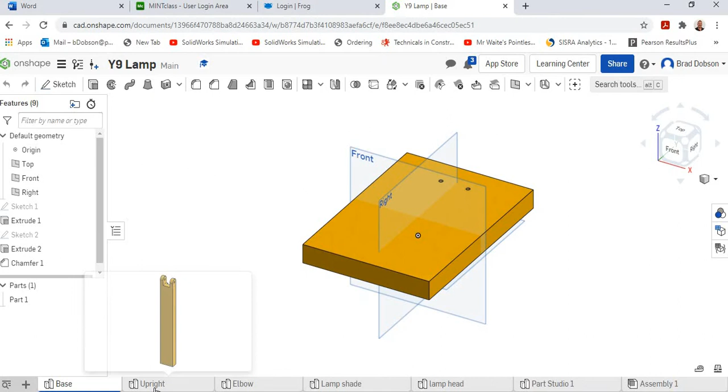Okay, now we've drawn up all our component parts. We've got our base, our upright, our elbow, lampshade, lamp head, and our cable cover. I'll just rename that.

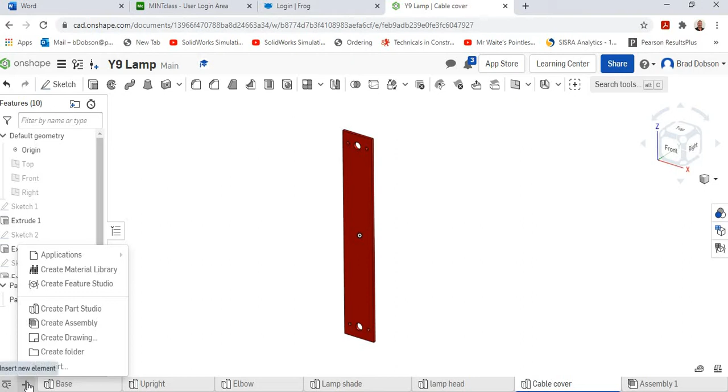We're now ready to actually assemble all our parts together into a functioning lamp, or into a model of a functioning lamp. So you'll see along the bottom here you've got an assembly tab. If that's never there, you can always add a new assembly just by clicking on this insert new element, but we've already got an assembly, so we'll click on that one. As you see, it looks very similar.

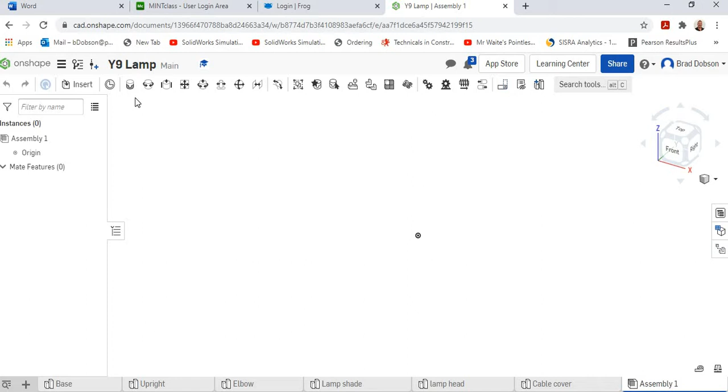However, you see that what's normally sketches turns to insert, and then we've got this series of mate connectors. Mate connectors are how we join our parts together, and we'll try and cover some of these as we go through this assembly. So it's relatively straightforward. We click on insert. You'll see it'll bring up all our component parts. We're just going to add our base first, because that's the one we want to start with.

So all I do is left click on it. It'll then drop it. Again, you see it allows me to move it. I want to position it somewhere sort of central to the origin. That's this little black and white dot in the middle. And the first thing I've got to remember to do, once I've done that, is right click over it and then fix it in space.

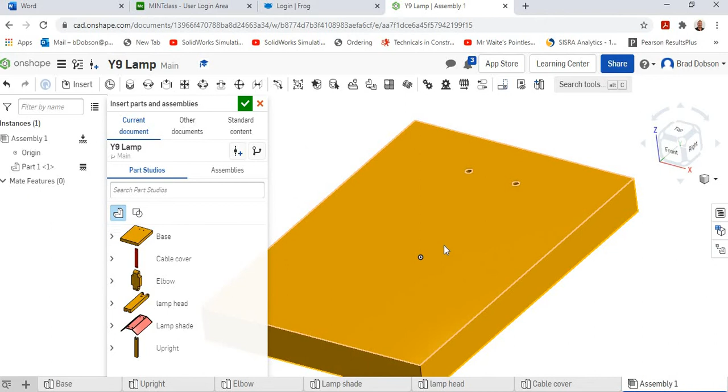So basically you'll see that it's sort of fixed around this origin now. I can still move it on the page, but I can't move it away from this origin. It's really important you do that on your first part. So we've got our first part fixed. We're then going to add our upright part. So once I've done that, I then go to upright.

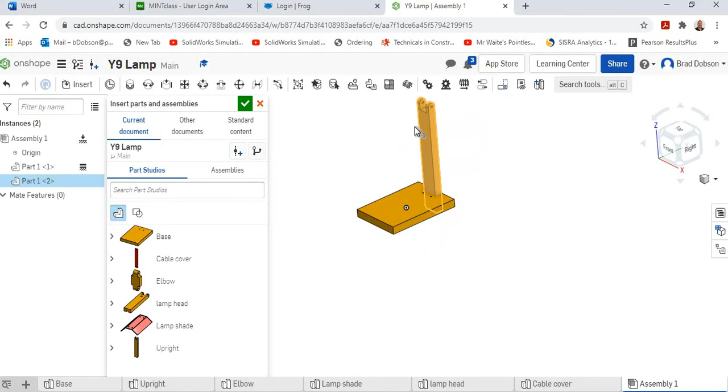So I'm already in the insert parts bit anyway, so click on upright, and you can see it'll then drop that in. Again, try not to drop it in the right place. You need to give yourself a bit of space to be able to see all the different views and everything. So I'm just going to drop it behind, and then we need to think about how we actually assemble this.

So if you're thinking you're doing this for real, what you'd want to do is align this bottom face here, basically attach it to this top face, so align them. We'd want these screw holes here to align with the bottom section here, and we want the back to be sort of aligned somewhere here. And again, how we can do that is quite quick actually in Onshape.

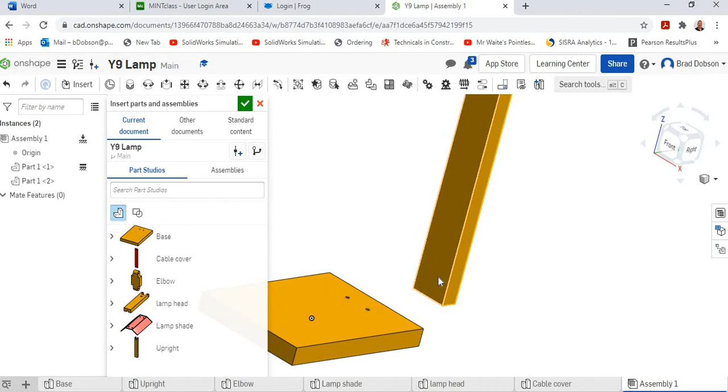Previously you've had to do all them separately, but we can do this with what we call a fastened mate. So once it's fixed in place, it has no degrees of movement. You can see as well when I hover over all these different mates, if I leave anything over for about 2 seconds, it gives me a little explanation of what I need to do.

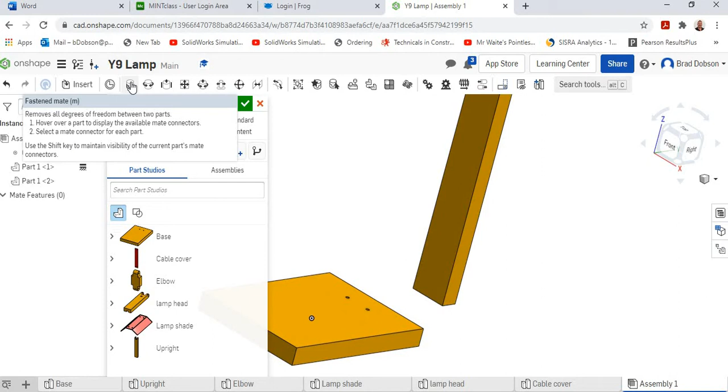So like I say, we're going to start on fastened mate, and I'll try and help show you how that works. So click on that. I'm going to select the bottom face. So I'm just going to rotate around. So you can see if I zoom in, I can select the bottom face, but I can also move this, sort of looks a bit like a timer. Whilst I'm there, I can move this, what we call the mate connector, to anywhere on our bottom face.

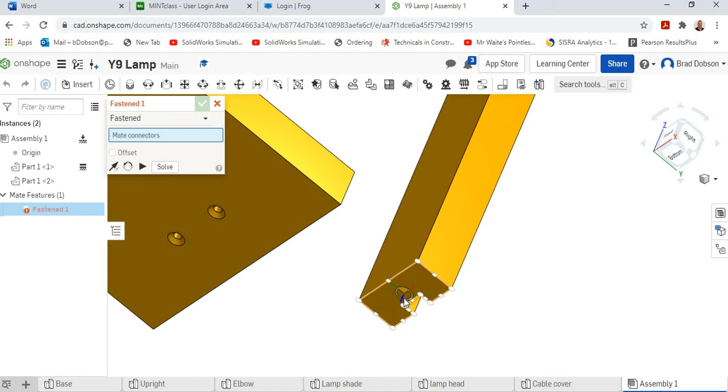What we want is our mate connector to be exactly, if I zoom in, in the middle of our little notch cutout. If you imagine that mate connector is like a big blob of glue, wherever I put that blob of glue, it'll glue to the other mate connector, you'll see in a minute, on the other part. So I'm going to keep it exactly in the middle, and then have that bottom edge.

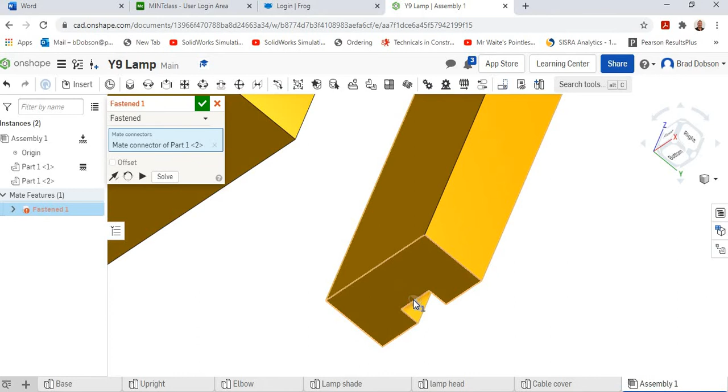So I click on it, so I've right clicked, and then turn my top round. So again, you can see here, I can select the top face, and again, I can select centre of holes, I can select midpoints, all that type of thing. So what I'm going to do, I'm going to select the top face. Let me just zoom out so you can see that top face. Again, you can do any face, but make sure it's the top face, and I want that mate connector to be aligned right on that midpoint of that edge there.

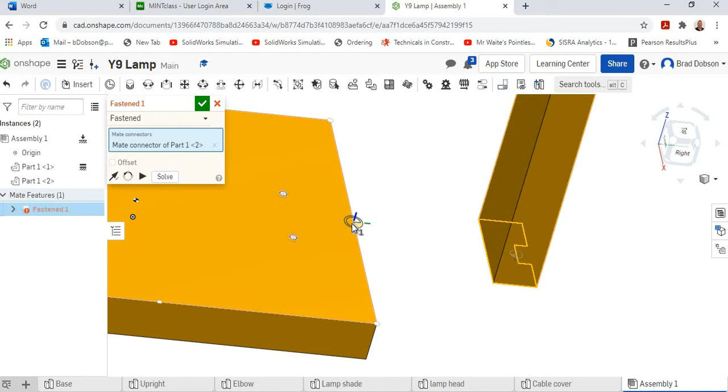You'll see that'll bring our work somewhere near, but you'll see that's not quite right. We actually want to shift this across here a little bit, so we're going to use this offset function here. If I click that, you can see I can start putting some dimensions in. We want to move the whole of this piece along this green y-axis. So if you see there, I can put in a measurement there. So we might start off with 25mm.

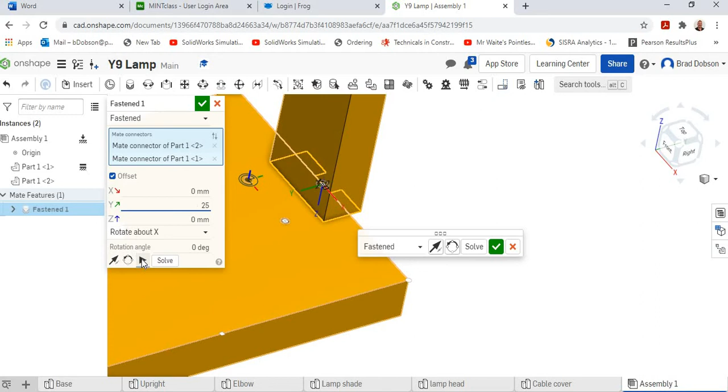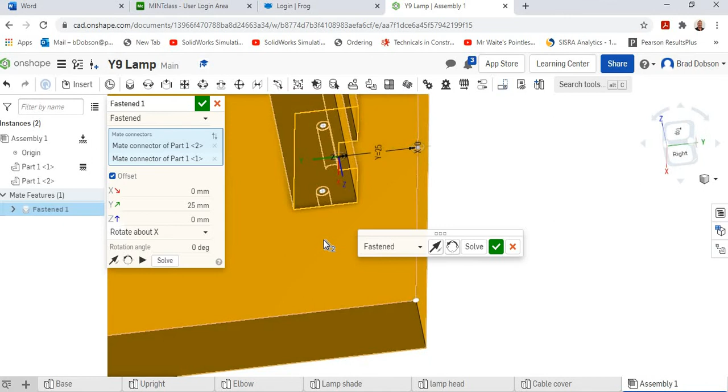Again, if I click on this little play button, it's going to give me a preview of where that wants to be. So you can see that's going to drop and move back our parts so that the holes are basically in the centre of where we need it to be. So we're happy with that at the moment, so we'll click on the tick box, and you'll see that's fixed that in position. I can't actually move that, I can't slide it anywhere, I can't rotate it. That has basically been glued in place. So that's our first part done.

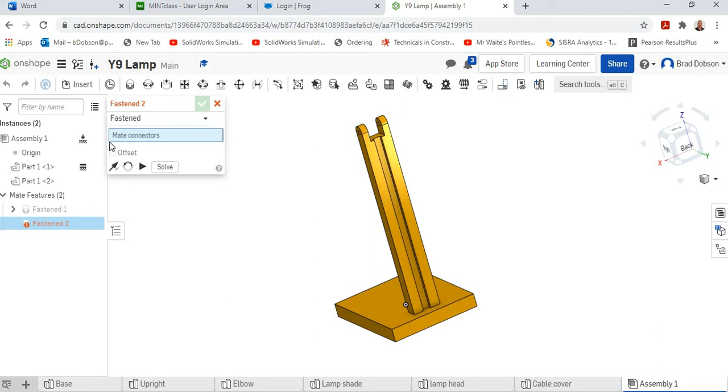Once I've done that, I'm then going to move on to insert again. Once I've done one bit, it always wants me to do a second one, so you just click off this one, and then insert the cable cover. So again, similar method, select it, try and move it out the way, and we're going to do a similar type of thing. I'm going to do it slightly different because it's a bit easier. So again, I'm going to do this fastened mate because I don't want it to rotate.

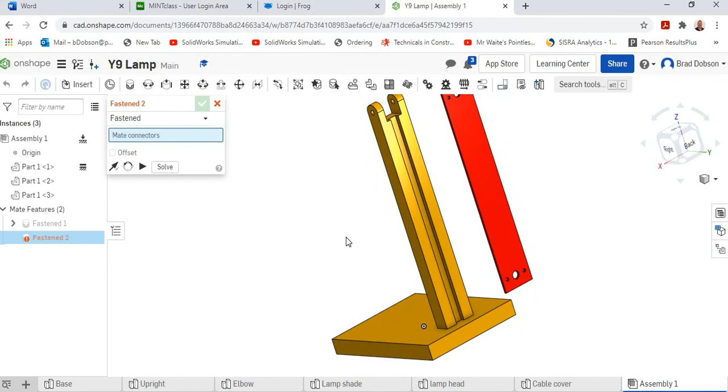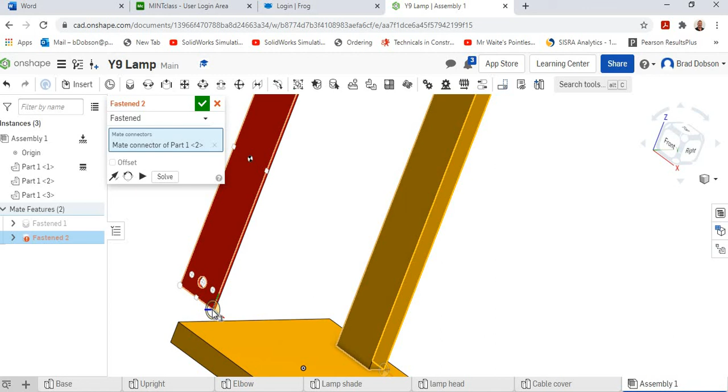This time, again, we need this slot at the back, so I'm going to select this edge, this face here, but I want the mate connector to be right at this bottom corner here. So I click on that. Again, imagine this mate connector is where everything's going to align and glue up. Click on that one, and then go to our back panel, and again I want to select this back face, but I want the mate connector to be right in this bottom corner. So those two mate connectors will align.

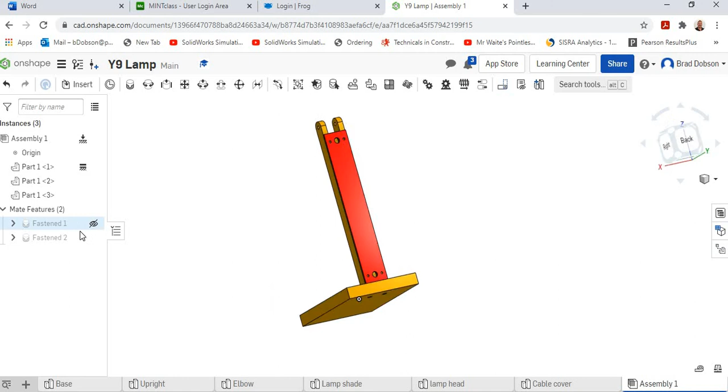You'll see it then drops it in the correct place for us. So that's a relatively straightforward one. Just click on the tick box, click on the red cross on there, because we've then added that section on there. So we've got those two parts absolutely fixed and assembled so far. So that's stage one of our assembly completed.